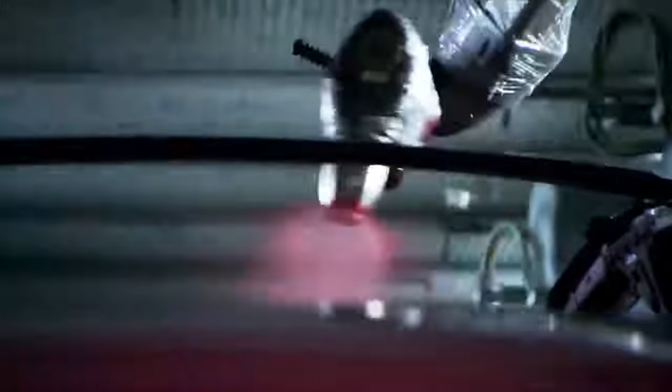This man has a vision to create the best electric cars ever seen and consign gasoline to history. This is something truly revolutionary. He wants to build his unprecedented Tesla car in a futuristic new factory and trigger an electric transport revolution. It's been a long time since something like that happened in the car business, but it's here.

It's a dream many have had, but none have realized. Aluminium bodywork, 19-inch alloys, and a $50,000 price tag.

At first glance, this car is the latest in a long line of high-end sedans. But that is where the similarities end. The Model S is a totally different type of car. Tesla believe it can lead a revolution and change the face of motoring forever.

It's the first ever mass-made premium sedan powered purely by electricity. Designed to have speed and range, and not a drop of gas. Our goal is to create an electric car that is the best car in the world and show that that's what an electric car can be.

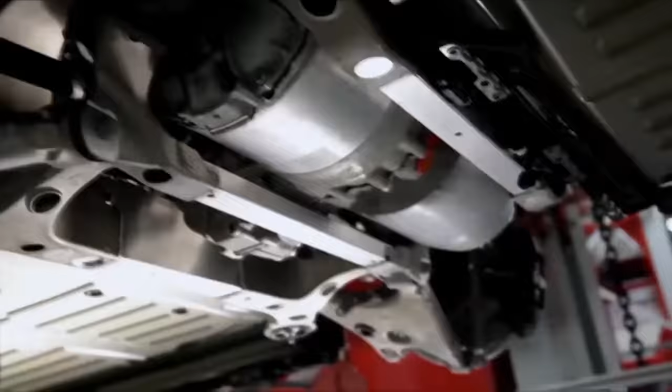Tesla's goal is to kill off the combustion engine and prove the electric car has finally come of age. Driving a gasoline car is going to feel like yesterday. Driving this car is driving the future.

This is Elon Musk, Tesla's co-founder and CEO. Elon is an inventor and a maverick entrepreneur, one of America's youngest billionaires. I like exploring, I like technology, I like creating things that have never been seen before or even imagined before.

He is a genuine Silicon Valley success story. In the mid-1990s, Elon set up a small internet company. By 2002, he'd sold PayPal for $1.5 billion. Next, he founded private rocket company SpaceX.

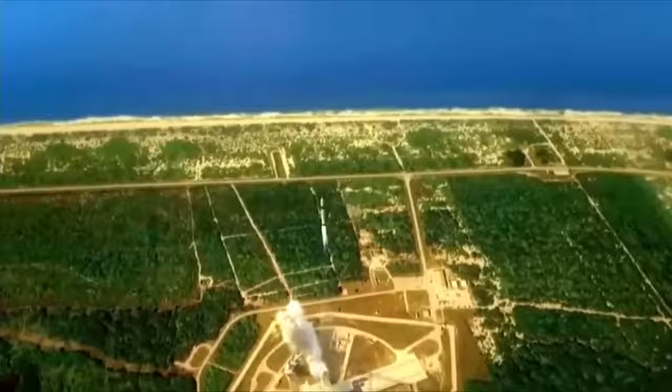It's all part of Elon's life mission. When I was in college, I tried to think about, well, what are the areas that would most affect the future of humanity? So the three things were the internet, making life multiplanetary, and the third being sustainable energy. So that's what really ties together my companies, is that sort of thought from 20 years ago.

Tesla Motors is Elon's sustainable energy brainchild. Named after electric power pioneer Nikola Tesla, it's a car company that only makes totally electric vehicles. No hybrid and no alternative fuels. Absolutely no tailpipe. The company estimates their electric cars cause 50% less CO2, even if much of the electricity comes from a coal-powered plant.

It's technology Elon and co-founder J.B. Straubel believe we need. We're solving problems for our children, our grandchildren. Oil is a finite resource, and eventually we have to find alternatives. When you take that oil out of the ground and you burn it, it's extremely dangerous. We should not play Russian roulette with the atmosphere. We only got one.

Tesla's founders have a vision of a world without gasoline cars. They are convinced electric is not only cleaner, but better. Now, they want to prove it to the world.

They believe their cars can trigger a transport revolution and bring electric motoring to the masses. What we're doing here at Tesla can have an amazing impact and revolutionize the auto industry and make every car on the road electric. That's our end goal.

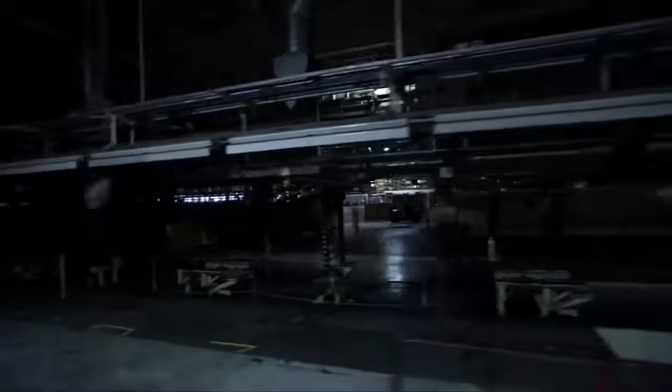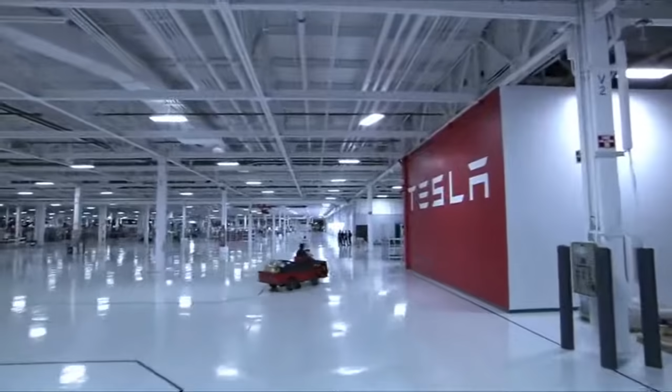The abandoned facility is a traditional car factory. Dark, little natural light, bare concrete floors. When Tesla Motors move in, it's the birth of a mega factory like no other. It's a totally fresh approach to car manufacture.

The walls and floors are painted white. The machinery is a striking red. Skylights and windows flood the factory with sunlight.

If you make the factory pristine and clean, that sets the tone for the vehicle. We want that same sense of quality and precision in the car itself.

As part of the whole company ethos, bikes are provided so the workers can get around the factory. I think it's important to have an environment where people look forward to coming to work, so it's worth putting some effort into making the factory beautiful.

In true Silicon Valley style, they fill the space with the most advanced technology, creating an automated production line capable of building tens of thousands of cars.

Super efficient multitasking robots, self-guided smart carts, and computerized production schedulers.

The factory is designed to be up there with the very best in the world. We love engineering, we love beautiful machines, we love new technology, we love to innovate with high technology, and also in manufacturing, we love to do that.

Without training, these sophisticated robots are useless. They all need to be taught before they can run tasks automatically. Every robot is programmed by hand. The Tesla team has meticulously trained 130 sophisticated robots over a year and a half.

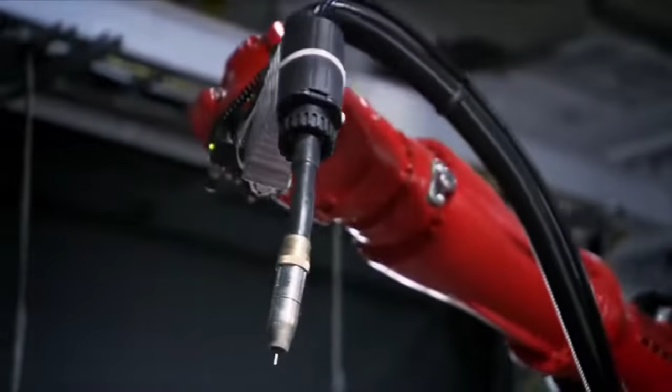One of the last robots still to be programmed is a multi-point welding robot. It will be used to join the car's underbody. These are pretty busy robots, so we've gotta make sure that our takt time is good.

A robot's work is only as good as the man who trains it. Brad Johnson is a welder with over 25 years' experience at the highest level. Getting this done today, we'll have the teaching all nice and smooth, and then we can start running 100% in full automatic. That sounds good.

The space in which the robot operates is treated as a three-dimensional grid. The head can be manually guided to any point using a teach pendant.

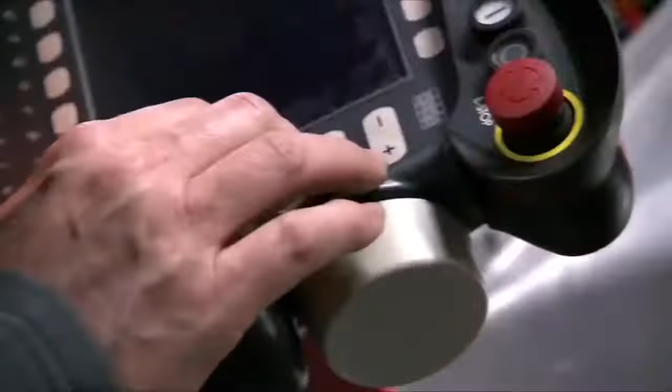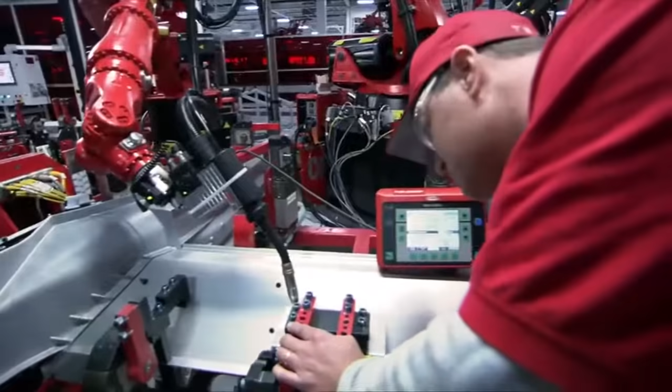There's our start point and our weld position. Brad guides the robot millimeter by millimeter and uploads the coordinates. The robot works out the most efficient route and runs the program.

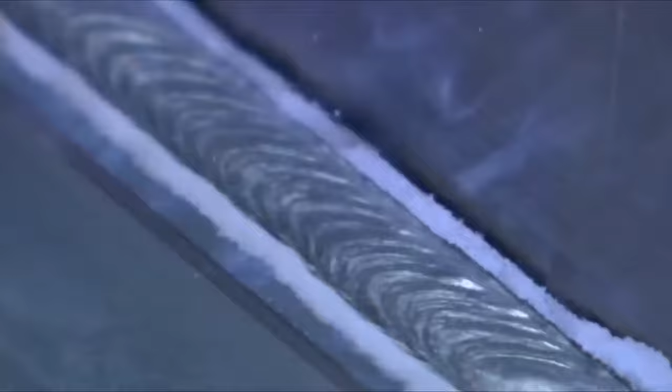Looks like the teaching is right on mark, and we have a really good quality weld right here, so we should be able to run full auto with this weld. When full production begins, Brad's handiwork will be exactly replicated by the robot 100 times a day.

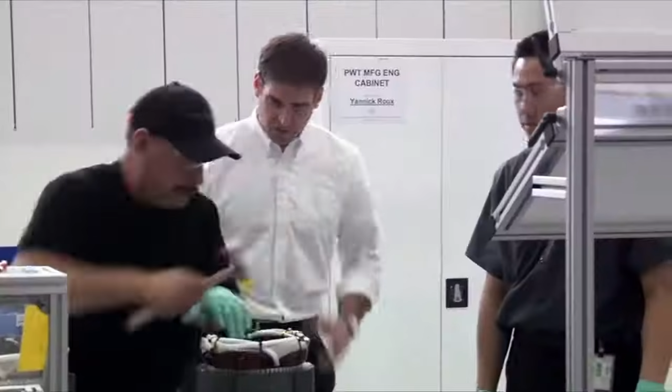Since their inception in 2003, Tesla Motors have been pursuing their electric car revolution with a step-by-step strategy. In an unconventional business move, Elon decreed that Tesla must invest in their reputation first and worry about profit later.

Stage 1: make a small number of high-value cars that prove electric power can be desirable. The Tesla master plan is very simple. We start off creating an expensive, low-volume car to help break the mold in electric vehicles.

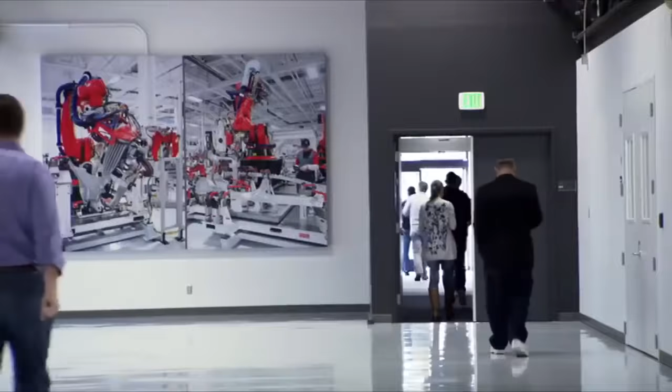Plan in place, they set to work on their first car, basing it around the British-built Lotus Elise. Five years later, they released the Tesla Roadster. Quicker off the blocks than an Aston Martin Vantage, the electric sports car astonishes the motoring world.

Step 1 complete in the Tesla strategy. What we showed was that an electric car could be sexy, it could be fast, and it could be long range, and that if you produce such a car, people would buy it.

But as a $100,000 two-seat sports car, it's a luxury second vehicle to most of its owners. Time for the pivotal Stage 2 in the master plan: a car that costs half as much and sells in much bigger numbers.

A very important step in the Tesla strategy is really going to show that a mainstream electric car can be better than a gasoline car.

The Model S is the second step in Elon Musk's vision of an electric revolution, a premium mass-market sedan designed and built from the ground up by Tesla.

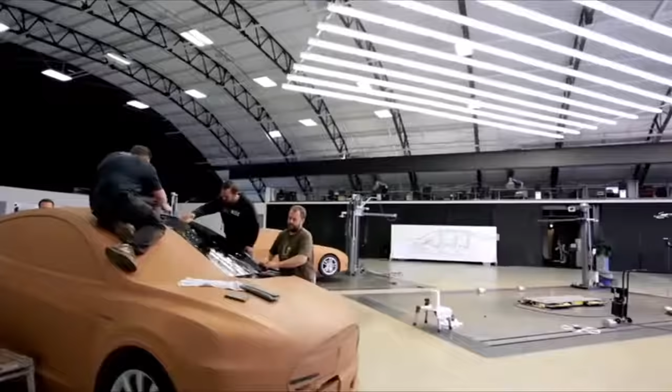At the studio in Los Angeles, they are working to craft that car. The Model S is really the foundation of Tesla. It's the first true product designed, engineered, and built and manufactured by Tesla, and it's really the beginning of what our mission is about.

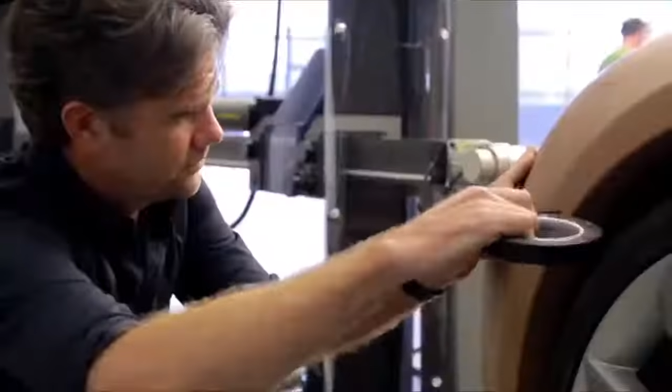Franz von Holzhausen is the chief designer. He believes Tesla's design needs to have some conventional appeal. It's really easy to have a clean slate and go pretty crazy with that. We had to start with something that people could relate to, whether they even knew or cared that it was an electric vehicle, they were attracted to it.

We've stretched the sedan and made it a little bit more modern, but it's still a sedan. It still has this somewhat traditional cue, and so it's easy to love because of that association.

Although uniform in appearance, the Model S is a unique car. It was conceived as electric. Even the shape is designed to maximize the battery's range. The body and the waist here is all slim, so there's no excess fat or body mass on this car. And that's another one of those elements that just translates into great efficiency.

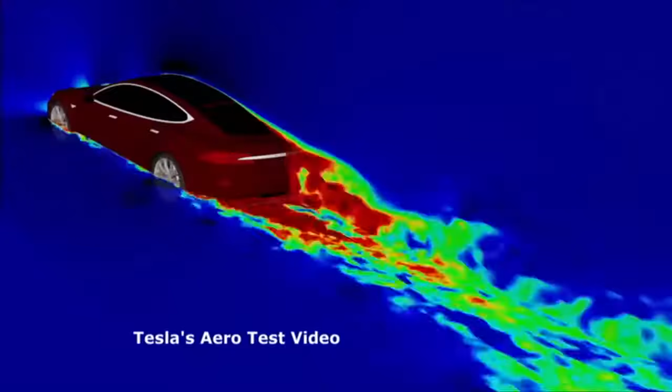This car is one of the most aerodynamic sedans on the market. In an electric car, conserving the battery power is so important, the designers put huge efforts into reducing the drag. Even the door handles are aerodynamic, receding flush into the body.

But it's the interior that is most heavily influenced by the electric powertrain. The powertrain is incredibly small. You get the same performance out of a motor that's the size of a watermelon, that fits between the rear wheels, and everything else above that is what I call the opportunity space.

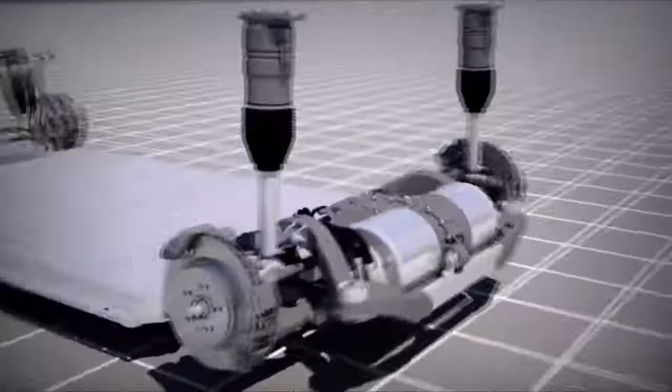The design team started with the motor and flat battery pack and worked upwards. With the motor next to the wheels, there's no need for a drive shaft, so there is no rise under the rear middle seat. There is no fuel tank or transmission. The Model S has free space from the floor upwards.

What you'll see is a vast amount of space. In fact, it's actually so big that we decided that we could actually fit 7 people, and we do that by putting 2 rear-facing child seats in the back here. And you can see where they fit here, and their legs go right down in there.

So this is what we call the frunk, and it's really the trunk in the front of the car. And arguably, you can put a whole bunch of stuff in here, even when the back of the car is totally loaded up with people and kids and stuff. And who doesn't need one of these?

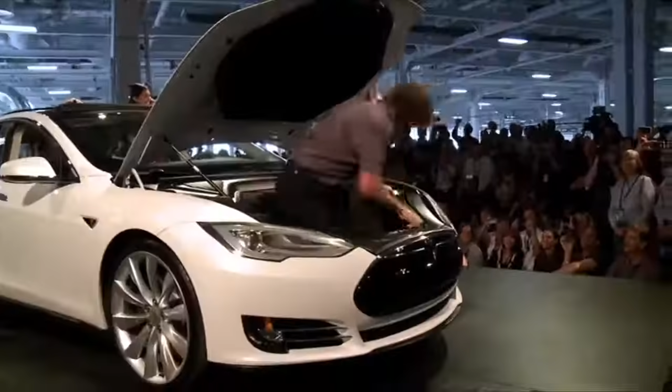Tesla promote these unique features at every opportunity. As a new marque, they're trying to make an impact in a marketplace crowded with established big hitters. Just looking at the United States, of the 3 other car companies, the youngest is 90 years old. So clearly this is not an industry that has been supportive of newcomers.

The Geneva Motor Show 2012. Another leg in the company's relentless promotional campaign. We're done selling Roadsters in North America, so this is our product. It's our product, Tesla product, and therefore we need to get it out to start selling.

Industry experts are judging Tesla on the Model S. It's seen as make or break. Maybe Tesla has a bright future. I think the Model S is very decisive to see if there will be a great future or if there won't be a future at all.

The company have taken the risk of collecting prepaid orders on the car. They've amassed nearly 10,000 advance sales. The financial boost also creates real pressure. I get harassed quite a bit actually by some people who have reservations, and it's a lot of expectations, very high expectations that we're going to have to meet and exceed, really.

Some prepaid customers have been waiting up to 3 years for their car. In return, they've been promised a delivery deadline. I do feel an incredibly strong obligation to those that have placed their faith in Tesla and put down deposits. I'll do anything to make sure that their faith is not misplaced.

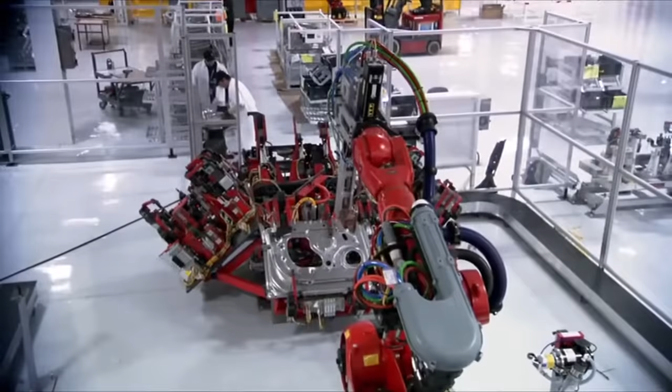The delivery deadline for the first cars is now only 2 months away. But the brand new factory hasn't built a production car yet. If the customers are to get their Model S on time, the facility urgently needs to start manufacturing. The speed at which we have to work here is extremely important to the company's bottom line. This is a kind of timing that is really, really challenging on many, many different accounts.

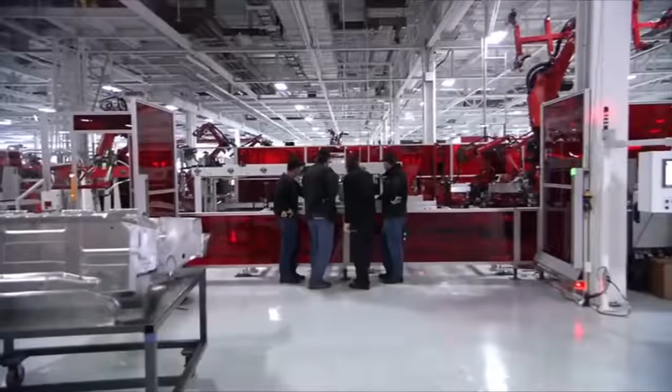Tesla need to build 20,000 cars a year. But before mass production can begin, Gilbert and his team must prove the factory is ready. The company is relying on them to get it right. We have to make sure that car after car, the quality is there, everything is perfect along the way. So we are really gearing up towards a production ramp-up.

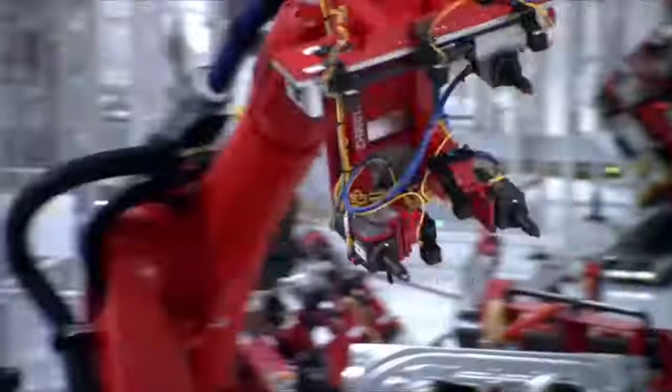Over the next few weeks, the factory will test manufacture a limited number of Model S. If the line doesn't perform with these cars, the company will be forced to miss their deadline. Tesla's electric revolution would be over before it started.

A very, very important moment is the birth of Model S in our Tesla factory. And it's where the rubber is going to meet the road, so to speak. The process begins in stamping. To increase the battery's range, the company have decided to build 97% of the Model S with lightweight aluminium. It's an extremely rare feature in a mass production car due to the cost.

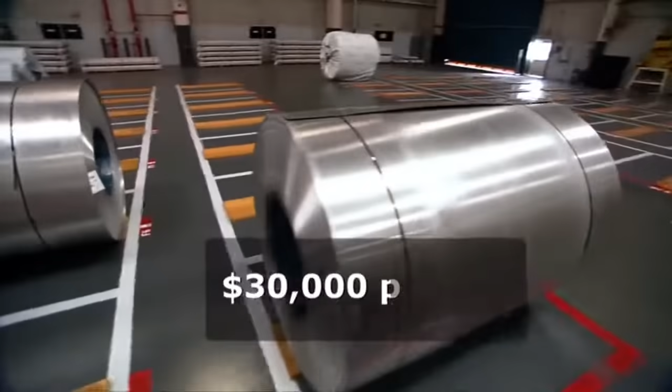Every Model S starts as one of these. The roll is loaded into the mechanical cutting machine.

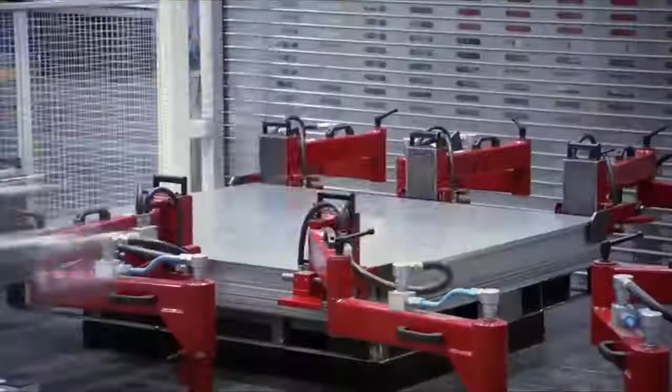Once cut, the panels are passed to the stamping press. We need to translate flat pieces of aluminum into 3D forms, and doing this with the level of quality that we expect is really, really challenging.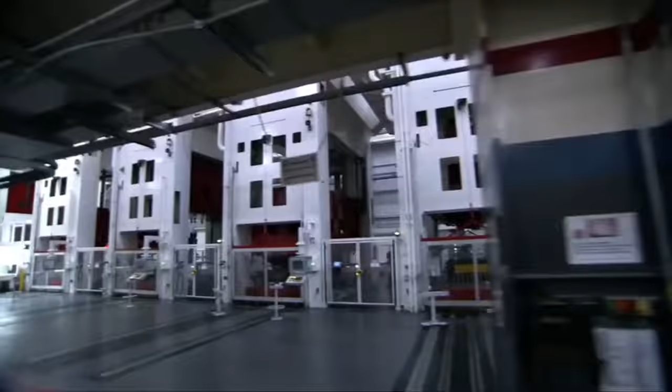To meet the challenge, they buy the largest available stamping press in North America. It's one of the first pieces of equipment they install. Over 3 stories high, it has to be transported from Detroit on 70 trains and then entirely rebuilt.

The immense pressure from the stamp allows them to press the complex body shapes needed for the Model S. It can be mounted with different heads, known as dies, that mold the panels into a wide variety of shapes.

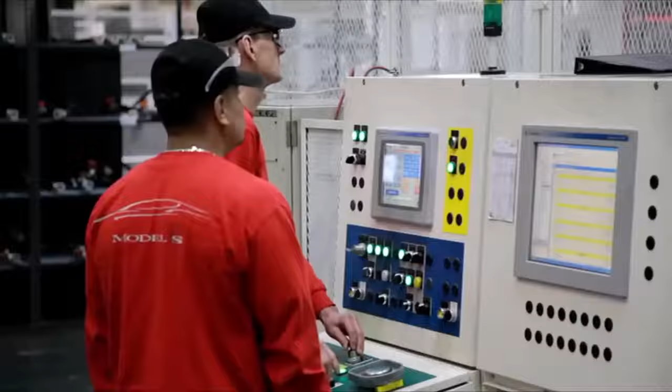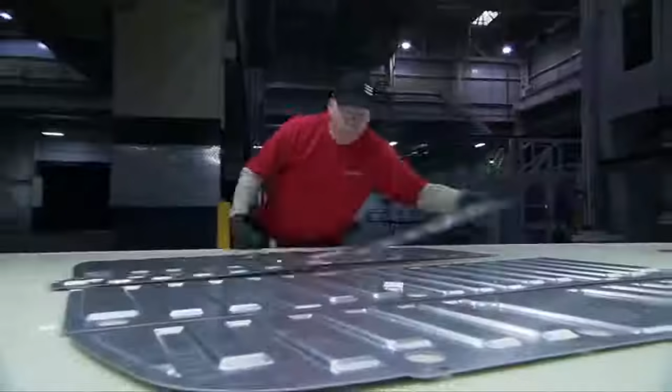Robotic arms feed the 4 stamps. Each stage forces a more detailed 3D shape, producing stacks of floor plates. These lightweight aluminum parts improve the Model S's power-to-weight ratio, which helps increase the performance and range.

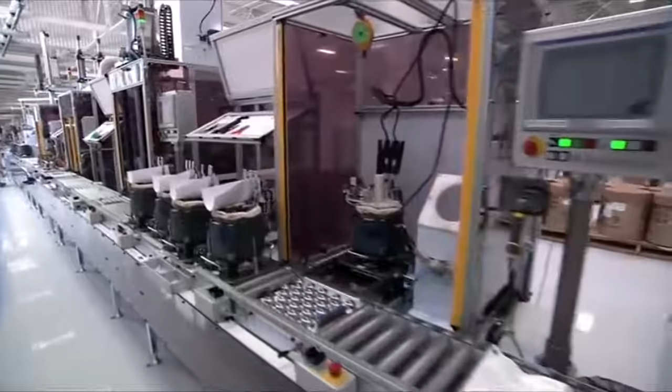Powertrain manufacture, 2nd floor. This is where they build the heart of the Model S, the motors and battery packs. Tesla know the electric powertrain will define their cars, so they push to advance the technology themselves. This is an extremely exciting field where inventions continue to happen even faster than they did in the years previous.

Tesla's solution to improving battery life appears startlingly simple. They use thousands of small lithium-ion cells, similar to laptop batteries. Thanks to these regular batteries, the company say the Model S has achieved a top range of 480 kilometers.

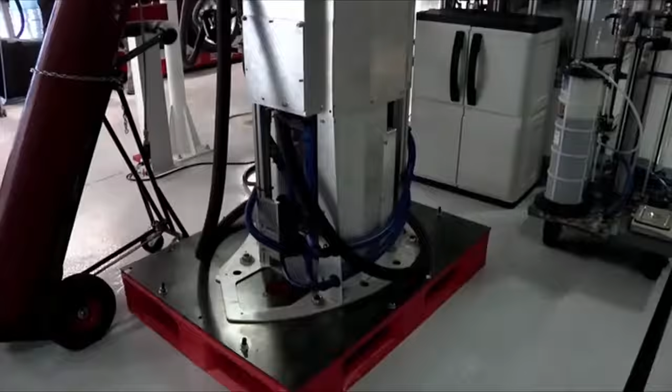Once you have 250 to 300 miles of range, then you're in a different usage mode, a range that is equivalent to most gasoline cars. The car can be charged by 100 kilometers every hour from a regular power outlet. Ultimately, Tesla are hoping to install superchargers along major highways that can charge the car to capacity in 45 minutes.

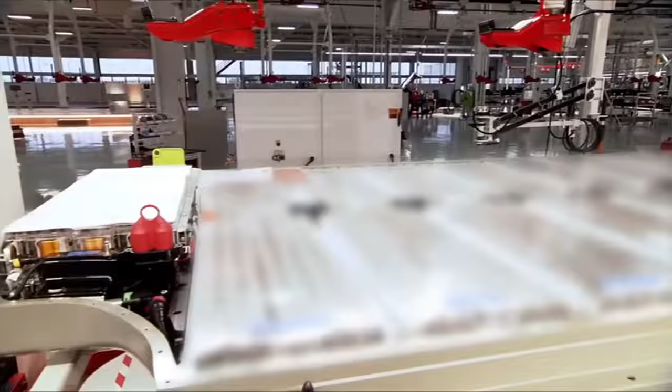You can charge the car up every night, but you don't need to. You can actually charge it once a week. The high-performance battery pack is formed with over 7,000 small cells. They're organized into a flat layer with specific groupings of positive and negative. The final layout is the key to the pack's power and range, and Tesla considers it absolutely top secret.

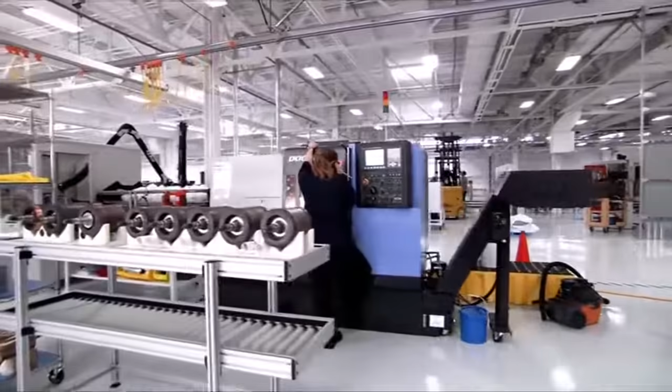The motor unit is also developed in-house. It's essentially an AC induction motor, a concept invented by 19th century scientist and Tesla Motors namesake, Nikola Tesla. He harnessed an electromagnetic field to turn a basic motor.

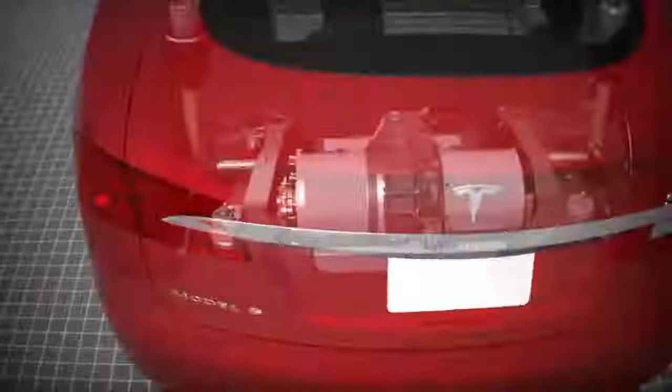Modern-day Tesla has developed their motor with a highly conductive copper cylinder. When the electromagnetic casing is fed with current, the copper cylinder inside starts to spin. It's nearly 3 times more efficient than a combustion engine. In fact, there are only 3 moving parts. It connects directly to the rear wheels and doesn't need a transmission.

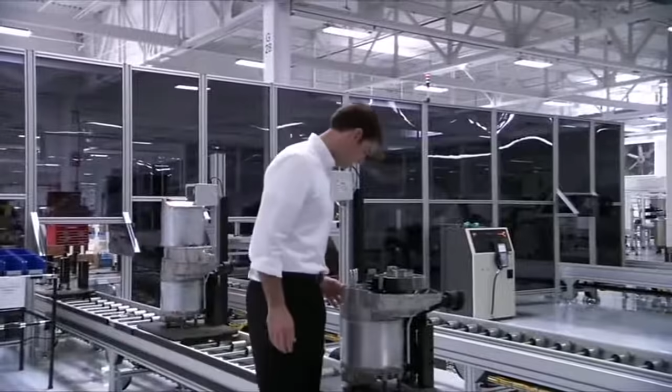These are the 3 moving parts in the whole Model S powertrain. One of the cool things also with this very simple gearbox is that when we want to go in reverse and back up, all we have to do is spin the motor in the other direction, and the car backs up. We don't need a clutch, we don't need a separate gear for reverse.

The entire drive unit is under 1 meter long, smaller than a golf bag. But it propels the Model S, a family-sized sedan, into the class of performance cars. In fact, this powertrain creates a totally different driving experience.

Program Director Jerome Guillen works constantly to refine it. As with the light switch, electric power can be fully applied instantly. The first thing that's going to surprise people is how much torque you get so quickly. That instant response—you cannot really mess with the throttle too much, because if you push on it, then the car will go.

Even from a stop, you have a very quick takeoff, because basically the torque is instant. So if I stop here and then I start, you will see that we have an acceleration right from the beginning. At any speed, you have that same torque available.

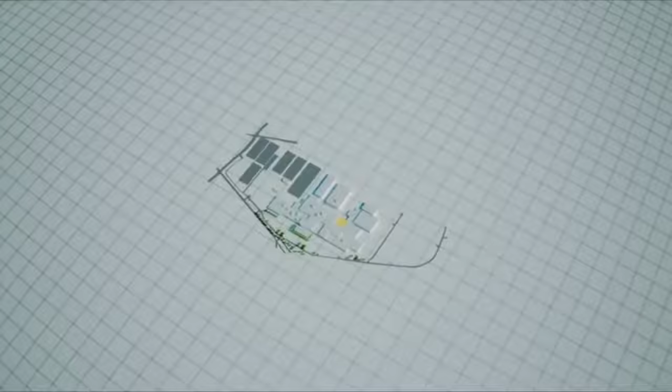In the factory, the delivery deadline is now fast approaching. The Model S test production cycle reaches the main assembly area. The car is based around a partially steel underbody. To make it, engineers weld struts and casts into a framework.

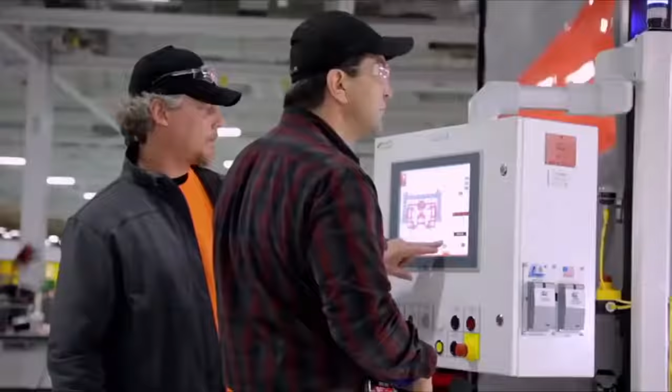Brad's newly trained welding robot is about to be tested in full automation. They have trained the robots with prototype parts. Now, with final components coming through successfully from stamping, it's automated production for real. Under observation, it's a tense time for the team.

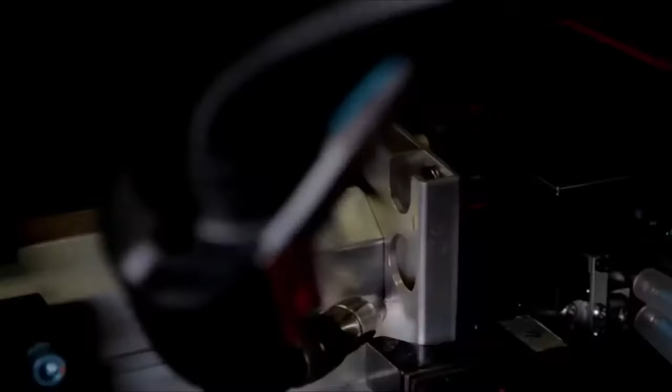The robots work in a tightly coordinated chain. The second phase hits an issue. It shuts the whole process down.

With the deadline looming, Elon Musk is determined to keep Tesla's waiting customers happy. He's organized a Model S test drive event for the people who've placed deposits. The test ride will go out onto Jack Northrop Avenue, so you'll get a chance to see that this isn't some show car that doesn't actually do what it says. It will go fast and with a lot of people in it. And quiet. And quietly, yeah.

Many have prepaid years ago, and it's their first time inside a drivable Model S. Customer and board member Steve Jurvetson captures his experience on his mobile phone. Wow, this is insanely cool.

It's a surreal scene. It's way cooler than I can imagine. You really definitely saw it. Yeah, it's nice. The first ride has to be documented here.

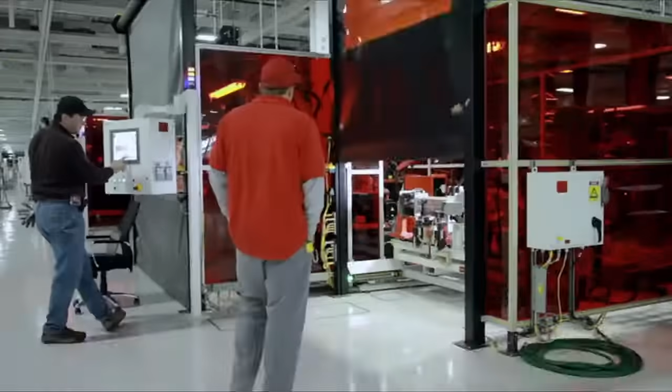With only weeks to go, welding has hit a glitch in automation. One of the robotic clamps is millimeters out of line. It's a tiny difference, but enough to disrupt the process. With the way the robots work and how we have such a tight tolerance of 1 millimeter to stay on, sometimes the new parts won't reach a prox, or the clamp won't close all the way. A major delay will disrupt the whole production schedule and threaten the deadline.

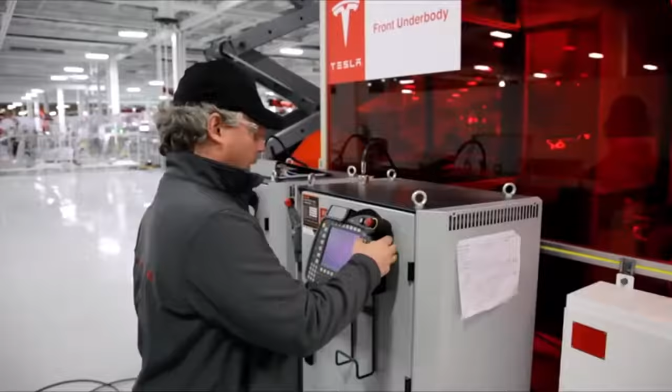They adjust the settings and set the robots in motion again. This time, it goes off without a hitch. To the team's relief, the process can be approved for mass production.

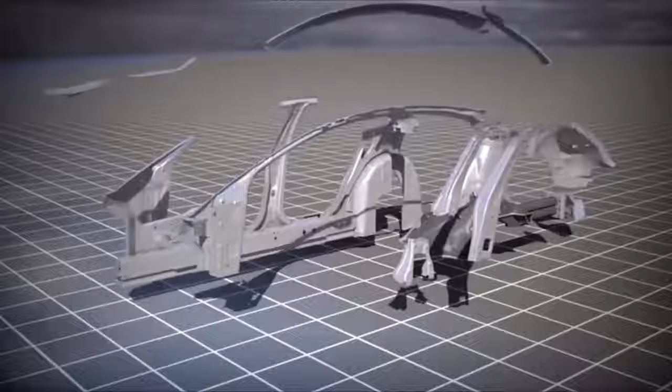The run through the automated line reaches the Model S exterior. The Model S body is made up of 14 different sections. To speed the workflow, Tesla construct each section at separate sub-assemblies: door sub-assembly. The internal frame is joined to the exterior panel.

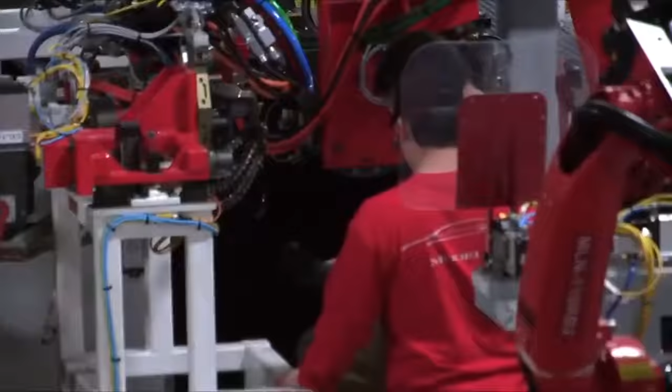As the robot's pincers come together, they fire a rivet and join the aluminium sheets. Over to the right, side body sub-assembly. One of the most advanced aspects of Tesla's robots is that each arm can perform a variety of different tasks. We have to use all the gamut of technology to make the aluminum joint between stamping and welding and riveting and bonding, all using robots that are multitasking.

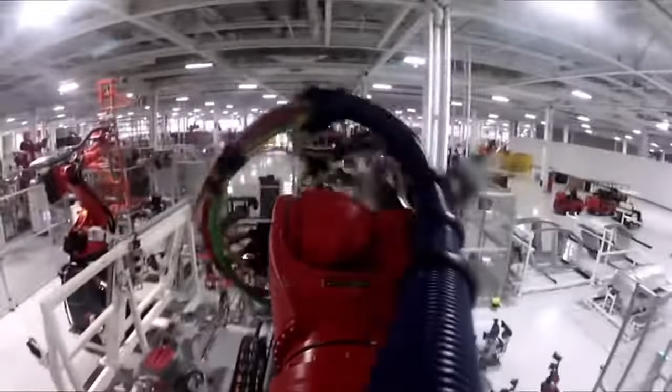This flexibility is essential for a compact and efficient workflow. A robot can spot weld using a pincer tool and then automatically detach the pincer and pick up a clamp tool. The same arm that joined the panels can now move it to the next station.

It's clever, but tricky and needs constant refining. When you draw something yourself, you take a pencil, then an eraser with the same hand. You change the tool, so to speak. Same thing here.

Once assembled, the sections are brought together at body assembly. Here, they're riveted around the welded underbody to form the basic shell of the car. All the sections are lined up alongside the central framing line. Gradually, the automated line builds up the side sections, ready to house the doors.

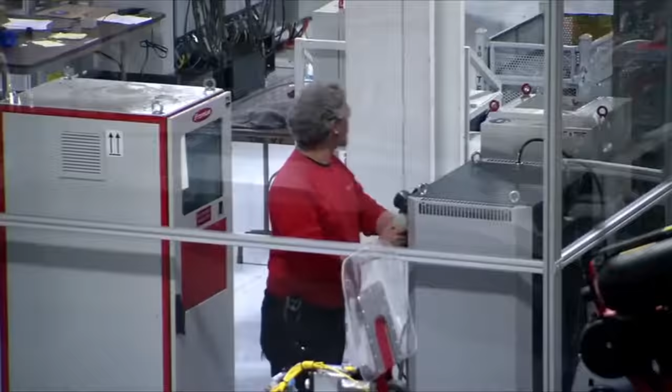A test batch of 3 cars is complete. Body assembly has demonstrated it can run successfully in full automation. It's a vital milestone in the countdown to mass production.

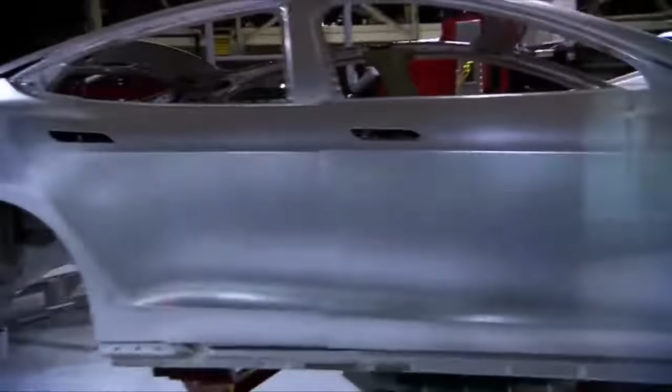Completely assembled, the aluminium body is now known as body in white. It's ready for some colour. The body in white is loaded onto an overhead train that carries it to the paint area. At this vast facility, the paint centre is in a totally separate building. The Fremont site covers nearly 95 football fields of space. It's so big, the Model S production line only fills 20% of it.

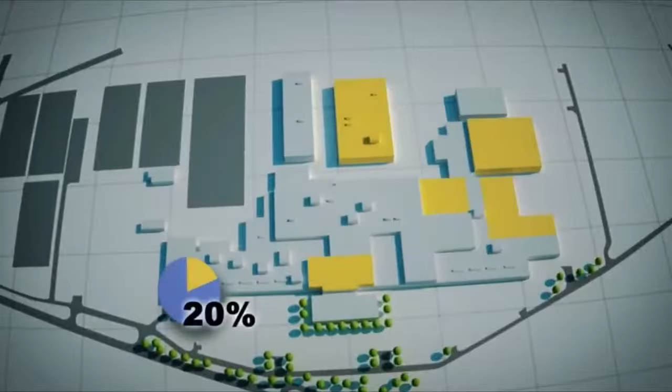For Gilbert Passin, the extra space is the cornerstone of Tesla's grand strategy for an electric revolution.

The Tesla factory is huge. It's about 5 million square feet on 2 levels. Right now, we are only utilizing a small fraction of the space, but most of it, as you can see behind me, is what we call the dark side. It's sort of dark and not utilized yet, even though we have a lot of plans for the future on how to fully utilize this entire building.

These expanses are an integral part of the company's stage-by-stage building plan. They want to fill the space with the production line for a further range of Tesla vehicles: a very high-volume, economy-priced model, the Stage 3 car.

In the future, we intend to expand our range of vehicles, maybe of a smaller size and also more affordable for the market. And this factory is ideal, and we are going to make this a super mega factory.

Long term, Fremont is meant to produce the low-cost Stage 3 electric car in the millions. It's the final step in Elon Musk's Tesla master plan.

To really have widespread adoption of electric cars, we have our 3rd generation vehicle, which would be a low-price, high-volume vehicle, and that's really what's going to fill out the rest of this humongous factory. I'd love to bring this to 500,000 vehicles a year as soon as we can.

The future of Elon's strategy first depends on the success of the Model S. In production, the time to the delivery deadline is now running low. The aluminium body arrives on the overhead train from Body Center.

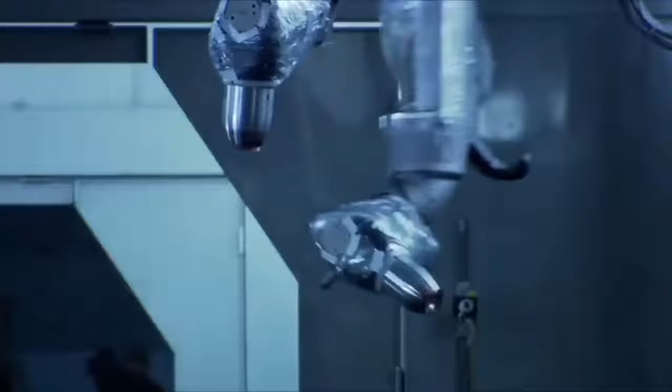Paint Center. This is where they make the car look like a premium sedan. It's a state-of-the-art process. There's a lot of technology that goes into the Tesla car, but the very first thing they'll tell you is what colour of Tesla car they bought. That's how important the paint is.

First, a roller coaster ride of treatment baths. Detergent to clean the surface, and then electrocoating. The electrocoat helps attract the paint to the aluminium.

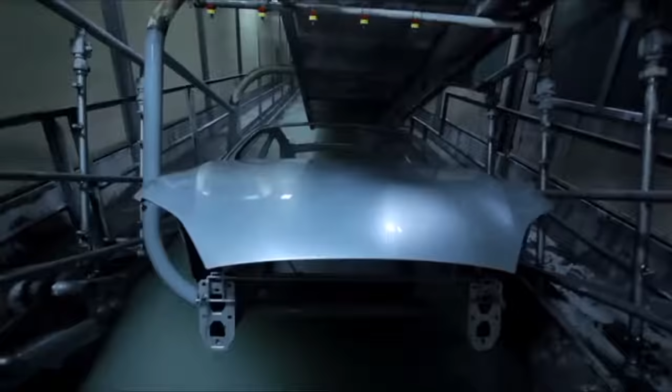The primed car is ready for colour. This vehicle will be sprayed with their trademark tint, what Tesla calls signature red. It's a colour we developed that's different from anybody else's red. It's been developed with glass flake to get the specific type of sparkle we want in that paint.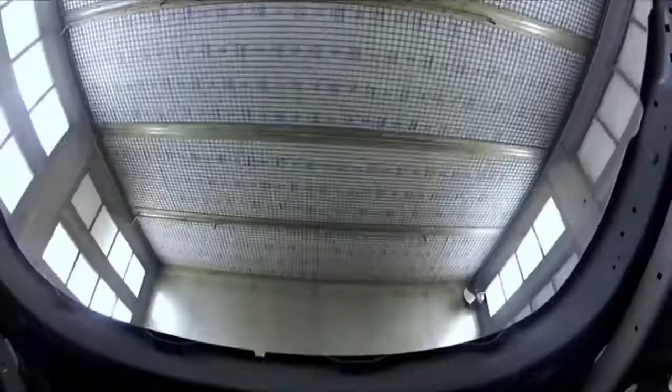It's a masterpiece of perfectly choreographed automation. Even the paint robots multitask, using a handle to open and close the doors.

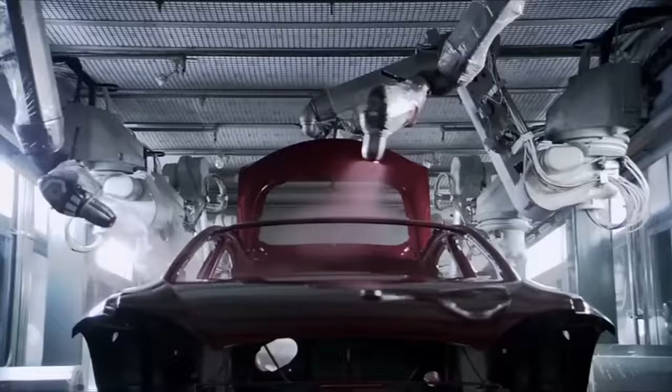Once it's through, the painted body heads up into the ovens to be baked and double glossed. A specialist team spends hours assessing the finish before the car is passed.

Elon's made it very, very clear to us what his expectation is for the paint job. He wants our paint to look like glass, like a piano finish. That's the challenge we've been given, and that's what we're going to do. The Model S spends over a day and a half in paint, and that attention to detail carries through to general assembly.

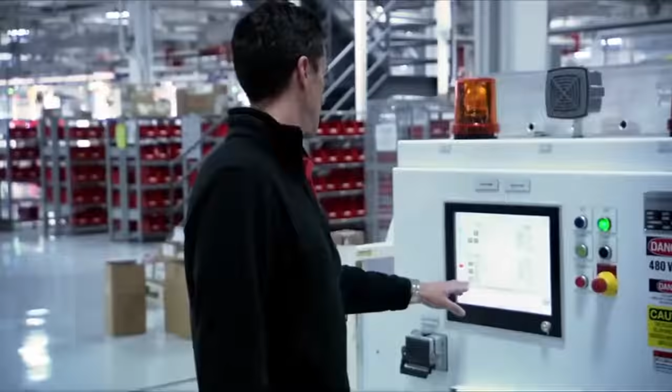First, the Model S's panoramic glass roof. The installation robot takes a picture of the top of the car, using the digital image to measure the exact orientation and bond the glass.

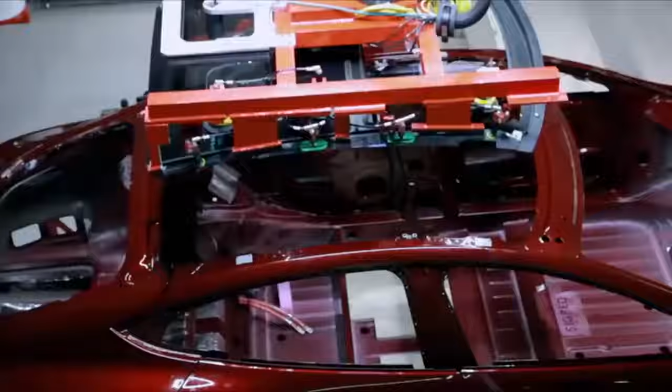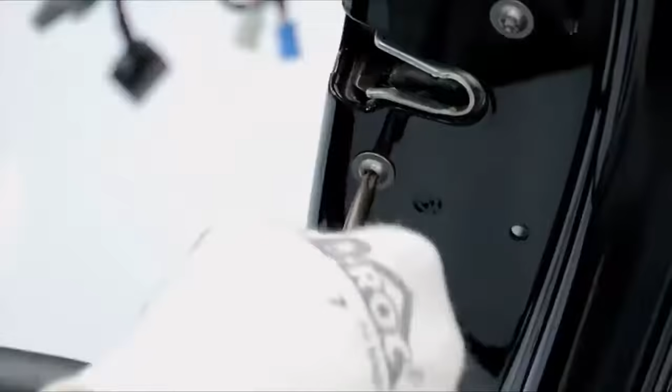Next, the interior. The wiring and seats are fitted. The aerodynamic door handles are installed. To get the delicate installation right, a wireless system adjusts the torque for each bolt.

The cutting-edge dashboard is lowered into the car. It's proof the car is a product of the tech-savvy US West Coast. The Model S carries a touchscreen tablet inspired by Tesla's Silicon Valley neighbors.

Tesla is very much a Silicon Valley company that has a Silicon Valley operating system, similar to a Google or Facebook or Apple, joined together with a tremendous amount of great automotive expertise. It's about bringing the things we're used to—our phones, our computers, and the interaction we have with them—into the car.

The car has a mobile 3G internet connection. The driver can download software upgrades and customize the display. The car's always connected to the internet, so we can understand your day, and we can know that you're going to work at 8 a.m. on Monday, and the car can be warmed up for that experience.

The entire command center is housed on the 17-inch tablet. The interior is virtually buttonless. It does some really amazing things. Not only does it make the rest of the interior super clean and uncluttered, it allows you to have amazing control of the car, with just a push of a button.

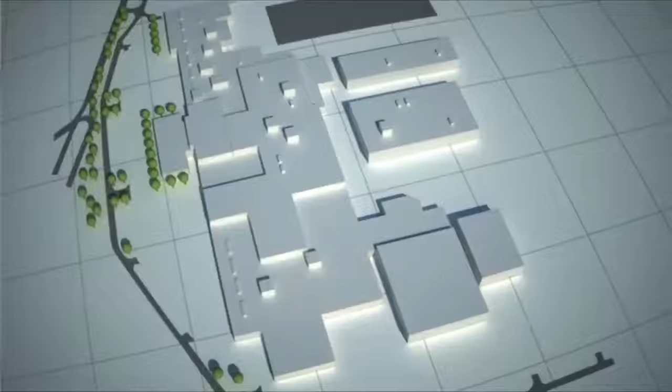At the factory, the start date for mass production is now only 2 weeks away. The first batch of test vehicles reaches the vital final stages: powertrain and body marriage.

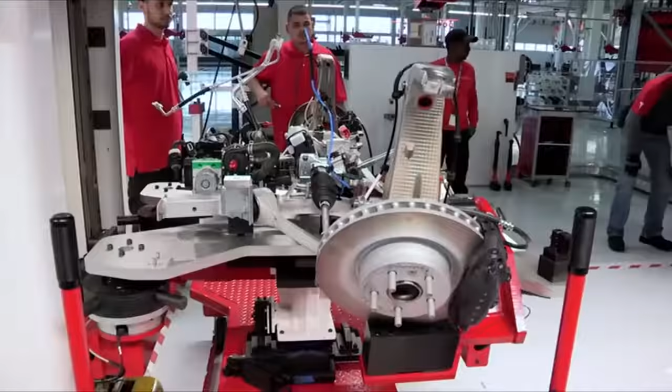In gasoline cars, installing the drivetrain is a lengthy process. With electric, it can happen in just 2 steps. Step 1: the motor unit, complete with suspension and brakes, is bolted into the rear wheel berths. There is no drive shaft or transmission to be attached—in one motion, it's fitted.

For final assembly, the work is mainly manual. Like the robots, the line workers' performance is being monitored. 509, guys.

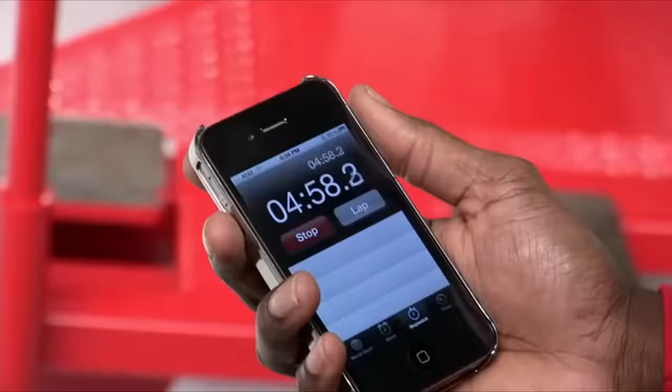With every vehicle, they're ramping up to the full production cycle time, or takt time. Every station in the factory has to achieve a certain operation in that takt time to get it to our customer on time. Here, the target is 4 minutes and 42 seconds. Throughout the build, you may hear me in the background saying we're at 2 minutes, we're at 5 minutes, so they know exactly where they are as we're shooting to get to that 4 minutes and 42 seconds.

Step 2: battery pack installation. The pack's steel case acts as the car's chassis. Bolted into place, it gives the Model S its rigidity.

A stage along, the first complete cars arrive at final inspection. At Elon's insistence, inspection happens on a bamboo platform—he believes you can only judge a car's beauty if it's framed by beautiful surroundings.

The last check is the test drive. At Tesla, the track is very different. Because electric cars produce no exhaust fumes, they can be driven indoors.

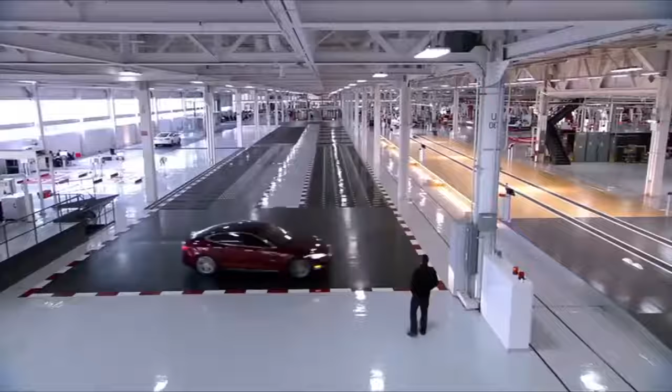Our people have done so well at putting this car together. You can see the remarkable quality of the paint and the entire vehicle, the body fit and everything. I'm so proud today.

This is the first Model S to pass through the production test run, and its quality proves the new mega factory is ready for mass production. It's a big moment for the company.

Just to see this car going around the test track here really demonstrates the fact that the Tesla factory is ready to go. We just had to make 20,000 per year more of this guy, and it's sort of a done deal—we just had to get it done.

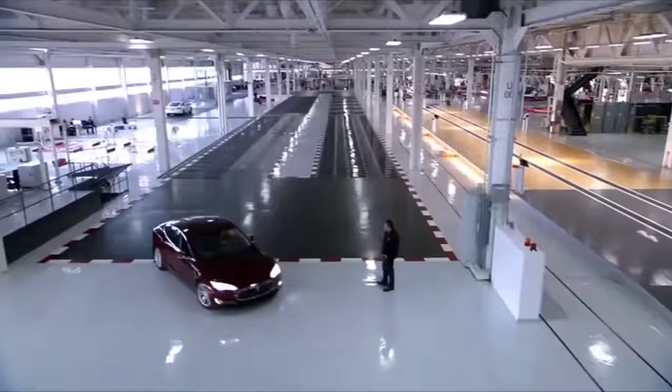The factory can now push towards the delivery deadline, allowing Tesla to pursue their strategy for an electric car revolution. Can you imagine if all the cars in the world were able to have zero emission, zero noise, and we could do that in a perfectly clean environment? That would be so cool.

This is Tesla's vision of an all-electric future: no fumes or heat, no noise or dirt, no expensive gasoline—just clean and quiet streets.

It's truly impressive to see how we are, day by day and person by person, changing people's thinking about what electric vehicles are versus what we've all grown up and taken for granted. If we can do that through one product, that's unbelievable.

10 years from now, Tesla will change the perception of what mainstream cars can be, and it'll become clear that electric cars truly are the future. The Tesla Megafactory may have just built its place in history.